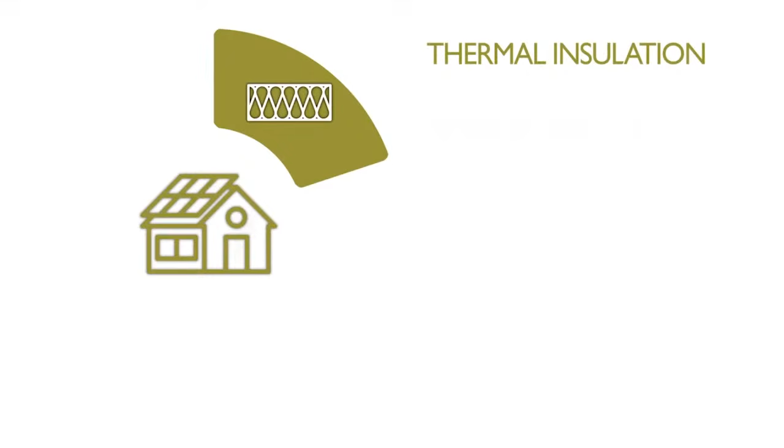There are 5 basic passive principles: thermal insulation, thermal bridge free design, airtightness, ventilation with heat recovery, and passive house windows, or more generically, high-performance glazing.

The purpose of designing according to these principles is to minimise the energy inputs required to maintain a comfortable indoor temperature. Ideally, the space heating and cooling energy requirements can be reduced to the point that passive sources such as solar gain and heat from the building occupants are sufficient for most of the time.

The Passive House Institute provides software, known as the Passive House Planning Package, or PHPP, to calculate these energy loads, and provides prescriptive guidance and details along with product certification.

While this approach certainly simplifies the process and ensures rigorous adherence to good or best practice, it does not always allow designers the necessary flexibility to balance the full range of project requirements.

In such cases, the Passive House guidance and principles can be viewed as best practice recommendations for designing buildings assessed by other means, such as national building regulations.

That said, the verification and certification services provided by the Passive House Institute can serve to greatly simplify planning and approvals for such buildings, and reinforce confidence and trust with subsequent buyers and sellers.

So let's now consider how the 5 basic principles can be applied and what they mean.

Thermal insulation is what limits the loss of heat from the building envelope and is the cornerstone of the fabric-first approach to building design. This approach seeks to maximise the performance of the basic components of the building, rather than relying on mechanical or electrical systems.

The fundamental physical property of insulation material is their thermal conductivity, also known as the K value or lambda value. This property measures how well heat can flow through the material by conduction.

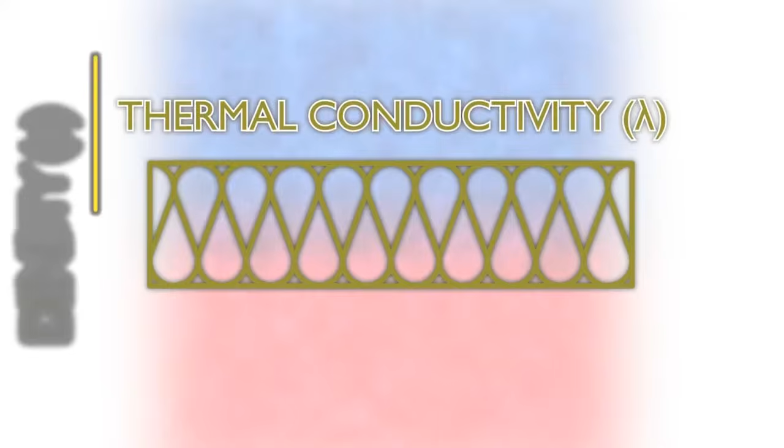In this mode of heat transfer, heat energy is transferred between the individual molecules of a material by direct contact. Because of this reliance on physical contact, there's a correlation between the material's density and its thermal conductivity.

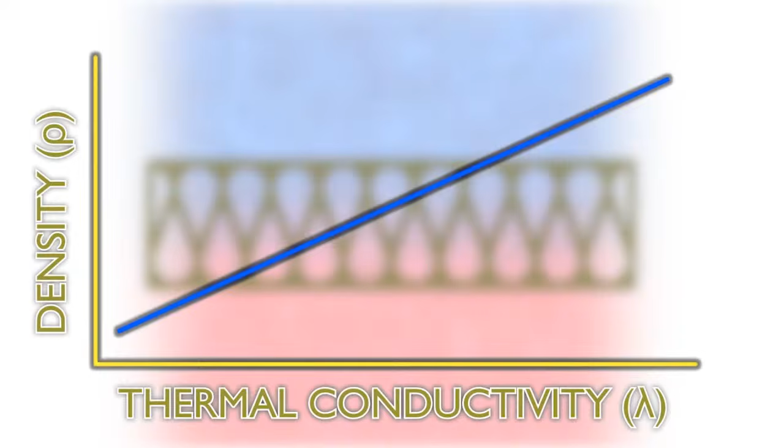So less dense materials such as foams and fleeces are less able to conduct heat than denser materials like bricks or concrete. Bricks, for example, have a thermal conductivity of 0.77 watts per metre Kelvin, while our Spacetherm aerogel insulation is far lower at 0.015 watts per metre Kelvin.

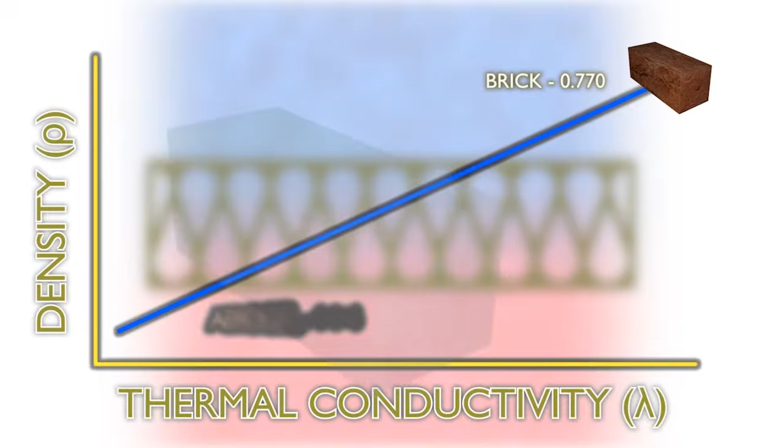Thermal conductivity, however, only looks at the basic material. It doesn't account for the thickness.

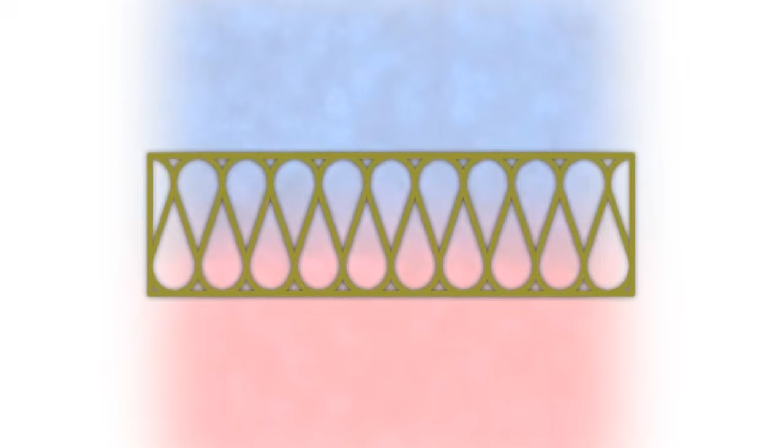To factor in the material thickness, we take thickness in metres and divide it by the thermal conductivity to give us the thermal resistance, or R value, in metres squared Kelvin per watt.

The next step is to convert that into a value for an entire wall, for which we use the thermal transmittance or U value, which is the inverse of the sum of the other R values for the different layers in the construction.

U values are quoted in watts per meter squared Kelvin. Where R values vary proportionally to thickness of materials, U values do not, so as we move to lower U values, we need to add exponentially more insulation to improve them further.

As an example, the limiting fabric parameter, more commonly referred to as the backstop or worst permissible U value for a wall given in approved document L for England and Wales, is 0.3, and the recommended worst case for a passive house is 0.15. The best practice passive house value is considerably lower at 0.06.

In practice, compliance with either standard is more complex than achieving a simple maximum U value, but roughly speaking, the worst case U value for a passive house would be considered pretty good under national building regulations.

The next principle is thermal bridge-free design. A thermal bridge occurs either where a material of higher thermal conductivity intersects a less conductive material, or where building elements join, such as at floor zones or corners.

Thermal bridges have two principal negative effects. Firstly, they increase the overall heat loss by providing an easier pathway for heat to escape, and secondly, they create cold spots internally. Condensation and mould growth can occur in these areas, which has a detrimental effect on the indoor environment.

The first of these, typically where structural elements like studs in a timber frame wall intersect the insulation, is accounted for via an adjustment in the U value calculation. This takes the thermal conductivity and proportional area of the bridges and adjusts the U value accordingly.

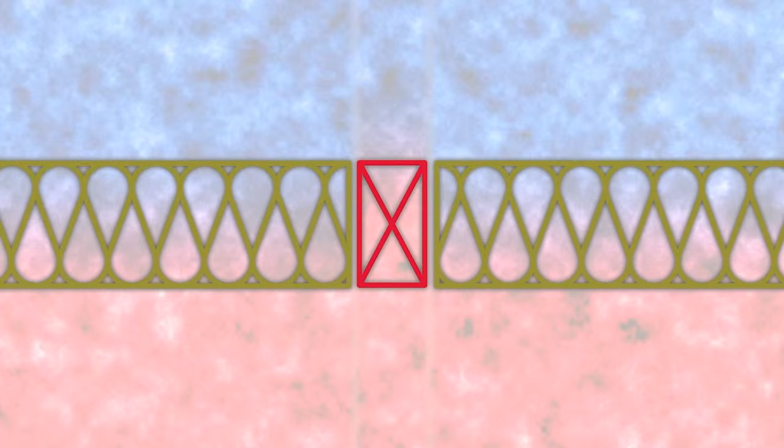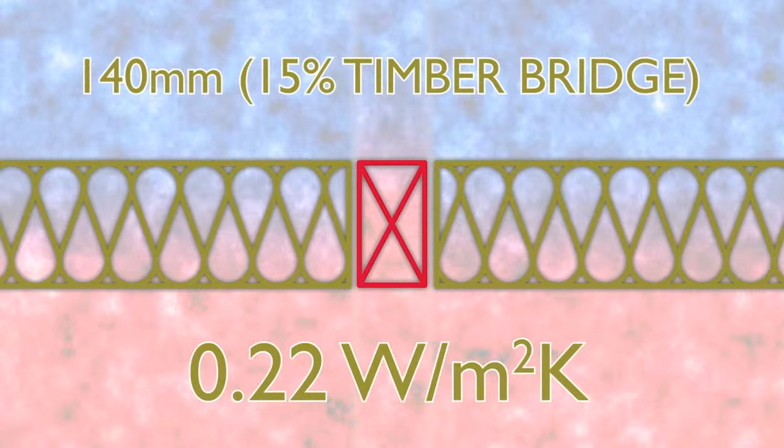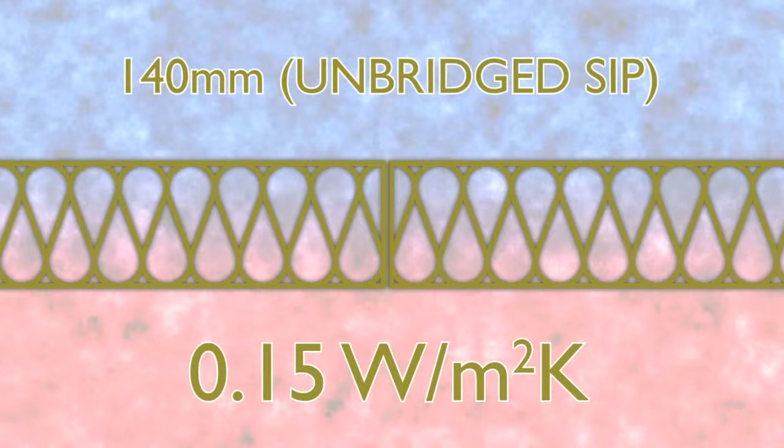If we consider a 140 mm thick panel of rigid foam insulation, if we use this in a typical timber frame wall, the U value then adjusted to account for cold bridging at the timber stud will work out to around 0.22. On the other hand, if we eliminated this cold bridging but used the same thickness of insulation in, for example, a structural insulated panel system, the U value drops to 0.15, purely due to the lack of repeating thermal bridges at the studs.

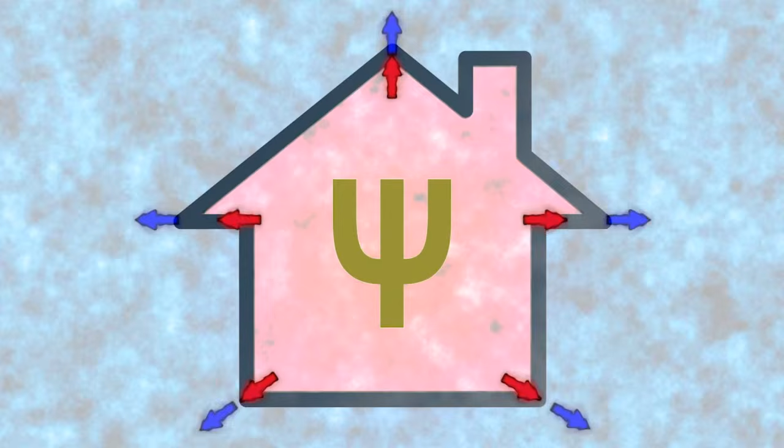Thermal bridging at corners and junctions is accounted for using an additional value for linear thermal bridging, known as a psi value. But in most cases, these are addressed using standardised pre-assessed details to limit heat loss.

The easiest way to visualise the way thermal bridge-free design works in practice is to simply imagine drawing a pencil line around a cross-section of the entire heated envelope of the building. If that can be done without touching anything other than insulation, the design is free from thermal bridges.

Because of the adverse effect that thermal bridging has on both the U value of individual elements and the overall energy performance, whether assessed via PHPP or SAP, reducing cold bridging in low-energy building is a matter not just of principle, but also of practicality.

Getting U values anywhere close to passive houses' best practice performance levels without restricting thermal bridging is virtually impossible. But even in cases where designers are aiming for lower standards, the benefits regarding limiting localised condensation are clear.

Whatever the assessment criteria, high-performance insulation systems like the Spacetherm Aerogel have a very important role to play in minimising thermal bridging by allowing the thermal resistance to be maximised at any given point.

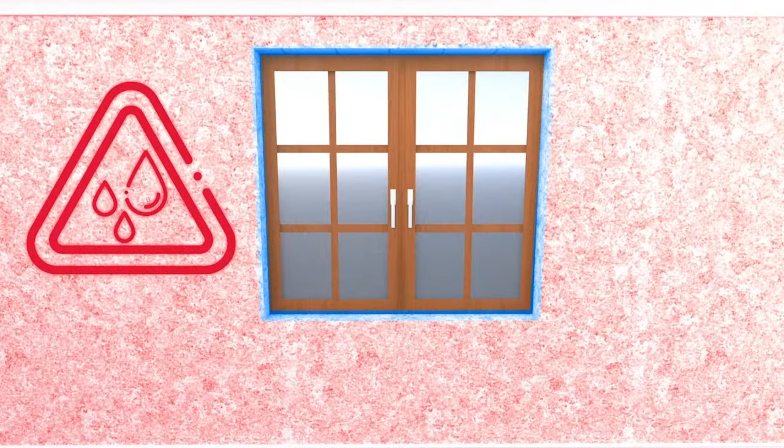In locations such as window reveals and door openings, it can be difficult to maintain a similar level of insulation to that found over the main sections of a wall, leading to these areas being relatively cold. In extreme cases, this can cause the temperature to drop to the point where condensation may occur in these areas.

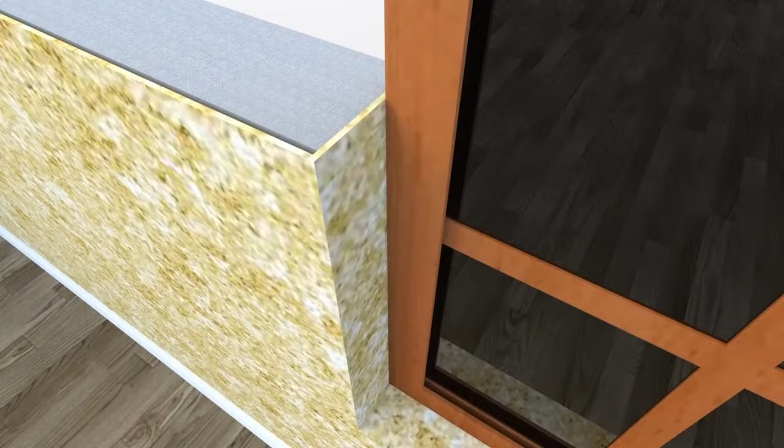As fabric insulation levels increase, so does the importance of continuity and uniformity. Systems such as Spacetherm, which provide high thermal resistances in minimal thickness, allow for a more uniform envelope of thermal insulation performance, with the localised drop in R values around complex features minimised.

The fire-rated Spacetherm Slentex A2 system also allows this continuity to be maintained where reduced combustibility is required, offering significantly higher performance per unit of thickness than conventional fire-rated insulation, such as mineral fibre.

Fibrous insulation quilts typically have a thermal conductivity in the range of 0.035 to 0.044, while the Spacetherm is 0.015 to 0.019, meaning like-for-like performance can be achieved in less than half the thickness.

While big thicknesses of insulation are expected and accounted for in passive and low-energy projects, it's not always possible to maintain such thickness over every part of the structure. Spacetherm can allow this uniformity to be achieved, and being of comparable permeability to fibre quilt, this can be achieved without compromising moisture movement.

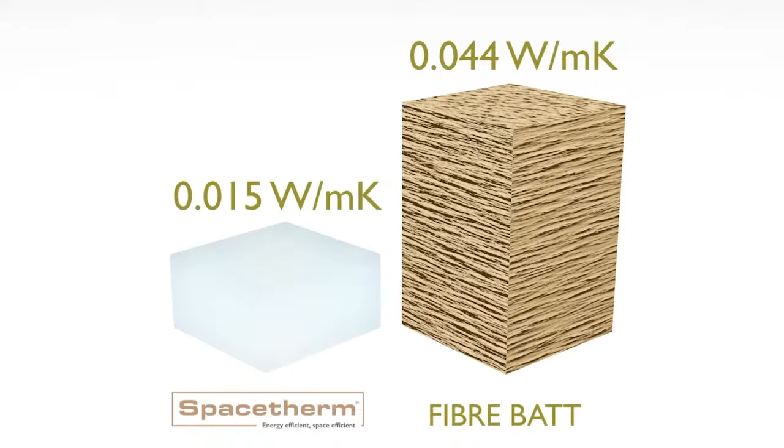Spacetherm can be supplied in a variety of laminated board systems to suit most applications, as well as in self-adhering cold bridge strips for direct bonding to structural elements such as steelwork. This need to create uniformity of insulating value and prevent cold spots is also an important aspect to consider.

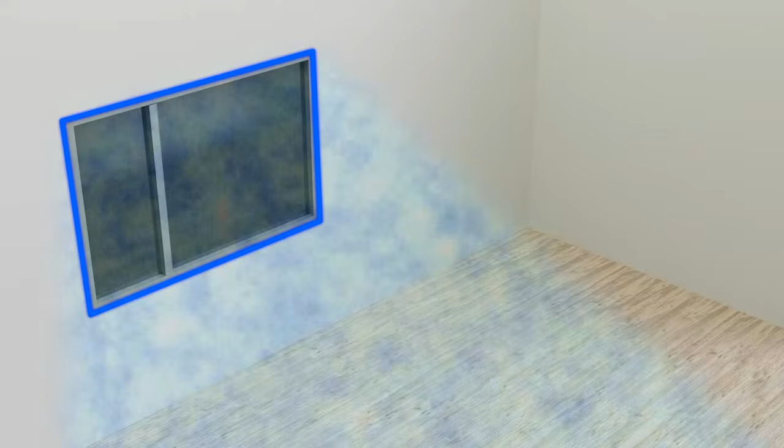When specifying windows in low-energy and passive projects, particular attention must be paid, as poorly insulating windows can not only affect overall heat loss but, as with cold bridges, can also create cold spots and cold radiation. This phenomenon occurs where the influence of a cold surface can be felt nearby, often leading to a perception that a space is colder than it really is.

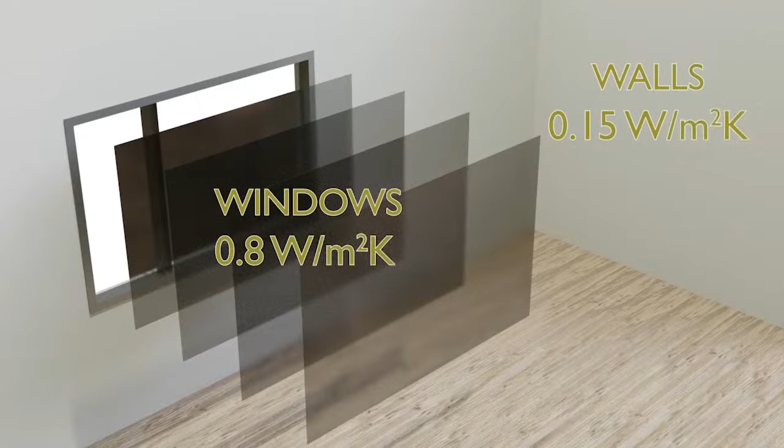Even using multiple layers of glazing, inert gas fills, and thermally reflective coatings, windows still typically fall a long way short of the performance of the rest of the building envelope, with passive house specifications calling for windows with a U value of 0.8 or less, significantly above the opaque elements.

Windows are also important to provide heat into the building via solar gains, and for this reason passive houses in heating climates like the UK tend to position the majority of glazing facing south in order to maximise this effect.

This requirement to maximise collection of solar heat has to be carefully managed though, as highly insulated and airtight homes can be susceptible to overheating if this is not carefully assessed and managed.

It's a common misconception that passive houses do not have opening windows, but in fact the specifications call for at least one opening window per room in the living spaces. Opening windows is among the most cost-effective and simple means of counteracting overheating, and is useful to prevent poor indoor air quality in exceptional circumstances such as large gatherings.

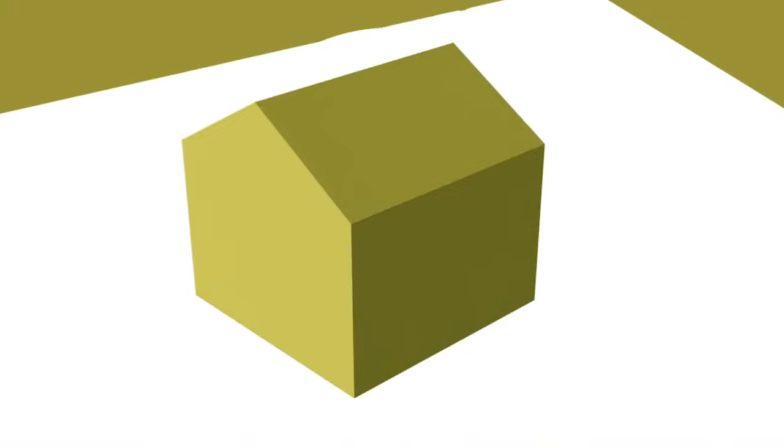That leads on to the next concept we need to consider, the airtightness of the structure. It's often said that airtight buildings can be like living in a plastic bag. However, this is a fundamental misunderstanding of what we mean by airtight buildings.

Reducing air leakage simply means eliminating sources of air infiltration and exfiltration over which we have no control - drafts, in other words. A good supply of fresh air is a critical component of healthy indoor living environments, and the passive house specification is designed to ensure this is facilitated by controlled and carefully managed ventilation systems, with considered impacts on energy performance. Uncontrolled air movement, on the other hand, should be reduced as much as possible.

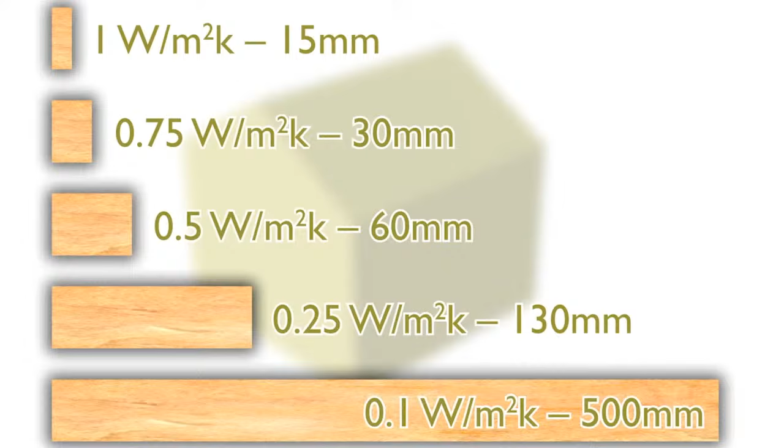As we've covered already, the thickness of insulation layers increases exponentially with reductions in U value, and after a certain point this becomes both uneconomical and impractical, even in explicitly low-energy buildings. It's therefore very important that every other factor affecting energy performance is controlled and limited to minimise energy usage.

In dwellings, there are two main drivers of air leakage: the internal stack pressure caused by the relative buoyancy of warm air and resultant convection, and external forces from the wind. Because warm air is less dense, it will rise upwards in a building and can leak out of any air pathways found at higher levels.

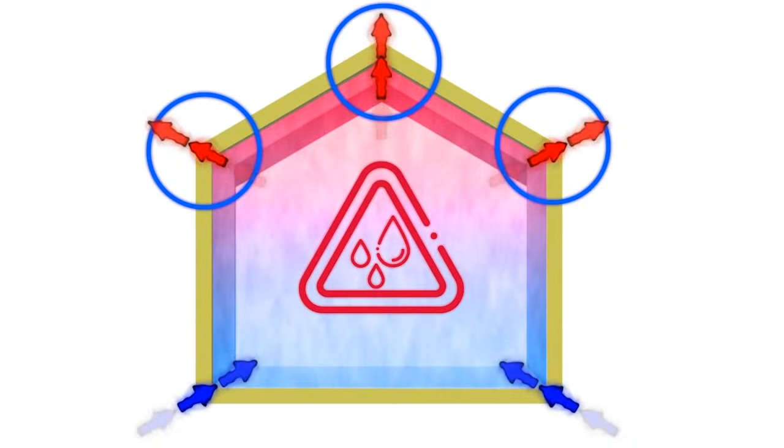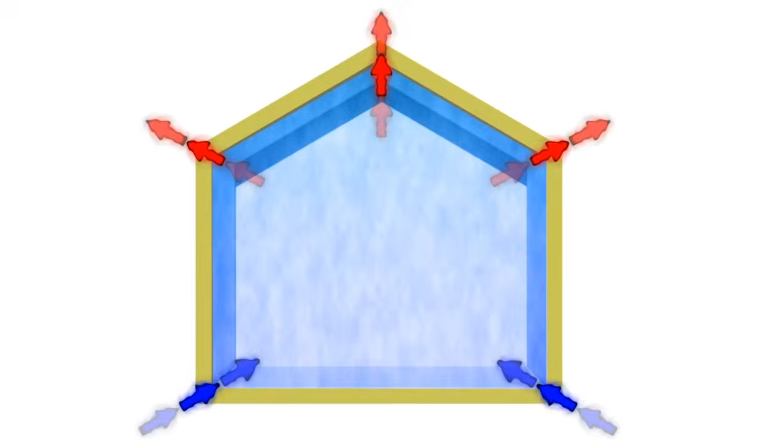Correspondingly, as this air rises, colder air must be drawn into the building lower down. As the warmer air will contain significantly more moisture, this outward air leakage can lead to condensation issues as the leaking air cools and deposits liquid water. The cooler air entering the structure lower down will lower the internal temperature in the building, necessitating energy input to maintain the temperature of the habitable space.

Externally, the wind forces acting on the building will have similar effects, but instead of the pressure gradient working from bottom to top, it will be aligned to the wind direction. Cold air will be pushed in on the windward side where there is a positive pressure, and warm, moist air sucked out on the leeward side where the pressure is negative.

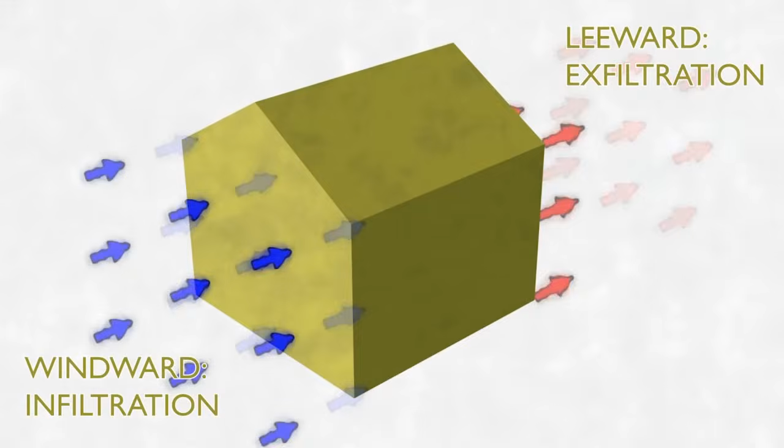Limiting this air movement is a critical part of low-energy design, as even a highly insulated building will have poor energy performance if the movement of air is not controlled.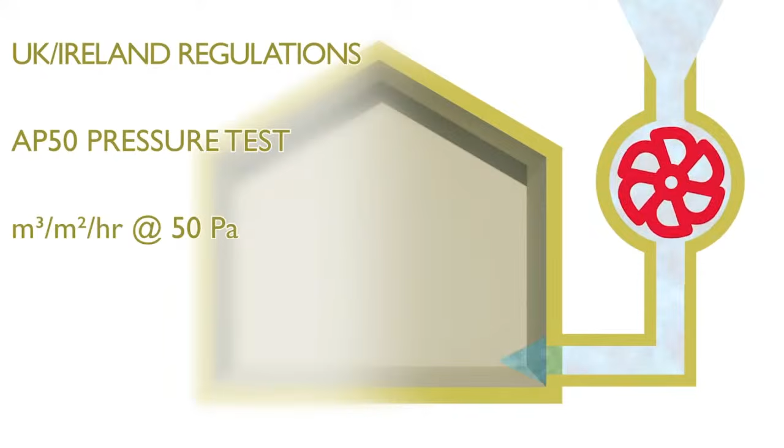Both the building regulations and passive house standards therefore include pressure testing and minimum performance levels, but there are some important differences. The UK building regulations use a pressure test known as AP50, which is the volume of air in cubic metres that flows through the building fabric area in square metres in one hour when a reference pressure of 50 pascals is applied. This pressure can be applied in either direction, by pressurising or depressurising the building.

The backstop value for this is 10 metres cubed per metre squared per hour in England, Wales and Northern Ireland. In Scotland and the Republic of Ireland, the preferred or reasonable limit is set at 7, and while it's theoretically possible to comply with a higher value, the necessary trade-offs will generally be unacceptable.

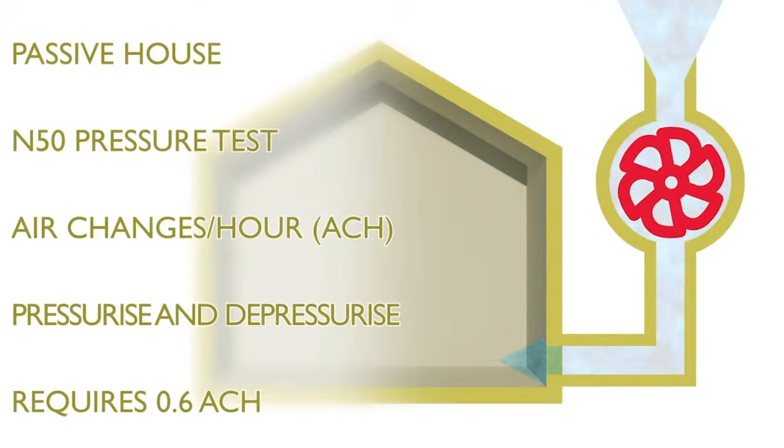Passive House expresses air leakage differently, using a standard called N50, which is the air changes per hour through the building's internal heated volume, ACH, at the same 50 Pascal reference pressure. In the Passive House test, pressure must be applied in both directions, pressurising and depressurising the building, and the two results averaged. The test equipment and procedure is largely the same for both AP50 and N50 tests, so it's possible to run both simultaneously, but the way results are calculated is different enough that conversion between the two values isn't possible without the source data.

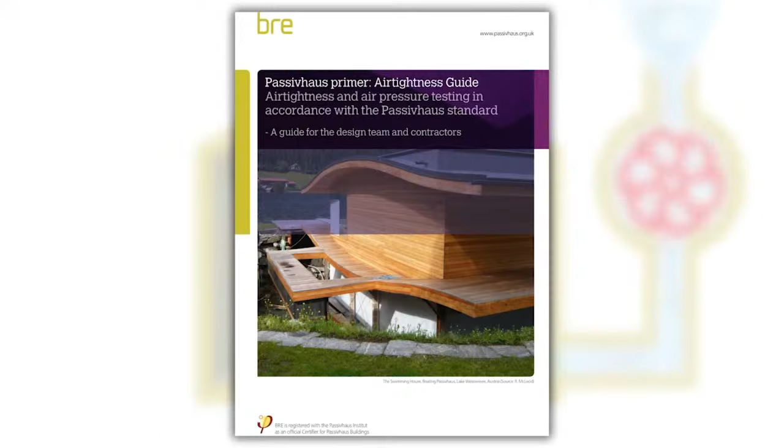There are numerous ways of making buildings airtight, and finding the most appropriate method for a given project is usually a matter of balancing competing requirements. Some strategies are easier than others, however.

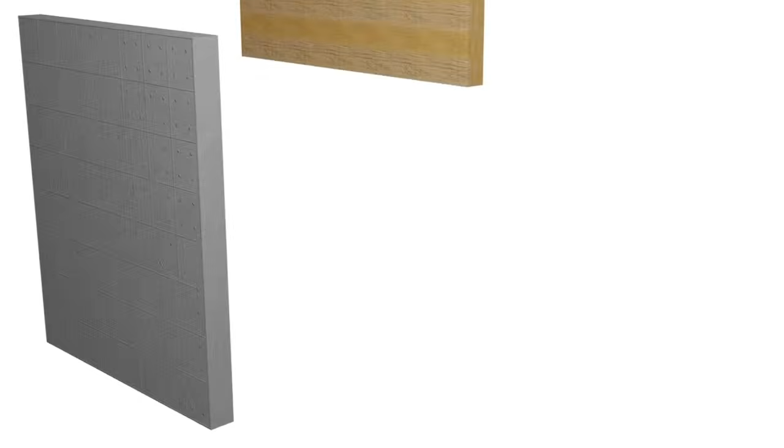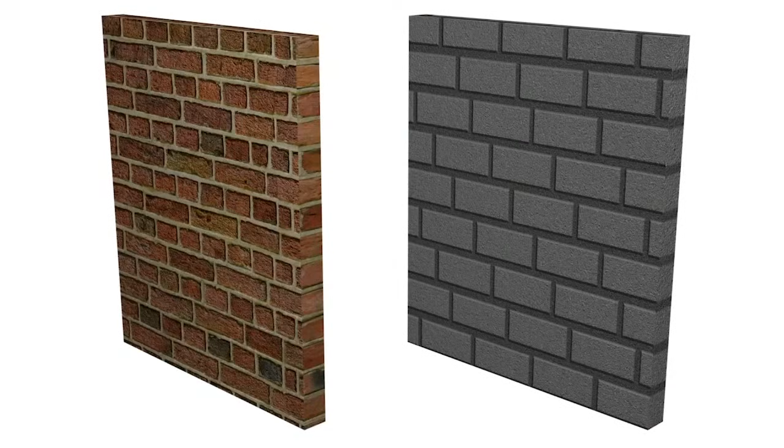Some building materials, such as cast concrete, cross-laminated timber and structural insulated panels, have an inherent advantage when it comes to air leakage, as the basic materials involved have low air permeability. Others, like blockwork, are more permeable, so require additional measures to control air leakage. In all cases though, junctions, services and the nature of the on-site assembly process still pose challenges to achieving a low air leakage rate, even when using the most impermeable base materials.

The conventional solution to this is to seal the inside of the building using a vapour and air barrier membrane. The advantage of this approach is that the membrane fulfills a dual purpose, limiting both air leakage and vapour ingress into the structure. It's also something most contractors are familiar with.

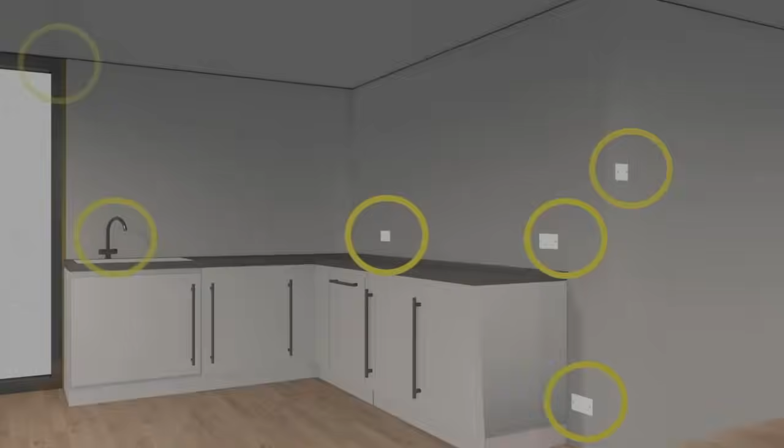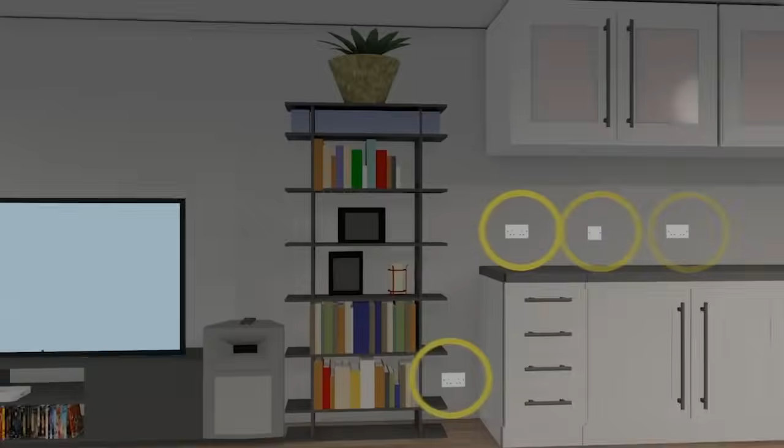The downside to this approach is that membrane integrity can be compromised by a variety of components and processes. Being internal, building services such as power, plumbing and network cabling must run through an internal air and vapour control layer. While this need not necessarily pose a problem, the nature of sites and trades, particularly in the UK, is such that VCL integrity cannot necessarily be depended on.

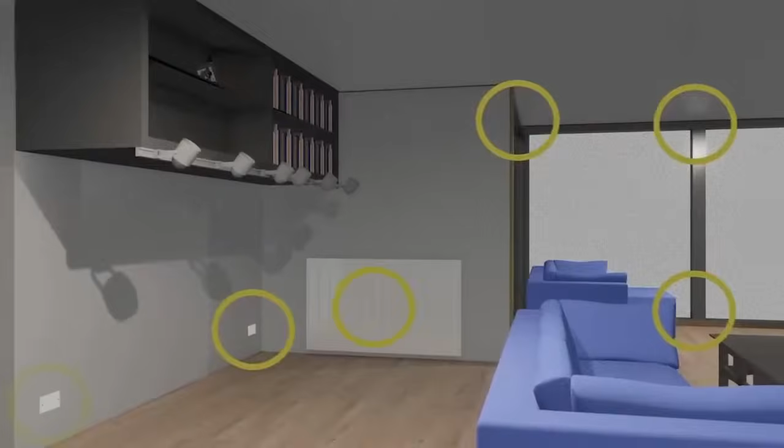Unless contractors of all disciplines are aware of the importance of this layer, suitably trained and equipped to avoid damaging it, and afforded sufficient time and space to undertake works in a manner that avoids puncturing this membrane, the scope for problems is limitless. Features like service voids, flexible pipe and cable gaskets, and sealed light fittings can all go some way to mitigating these risks, but these all increase costs and time demands, and aren't necessarily familiar to all contractors.

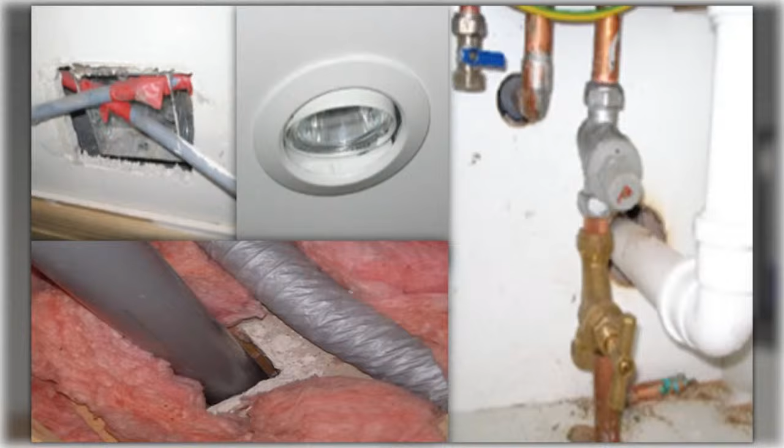For example, in Scandinavian countries, where low air leakage rates have long been standard practice, every plumber and electrician will be used to working carefully around air barriers. However, in the UK it's not uncommon for holes to be cut and drilled and work undertaken with no thought given to any knock-on effect on air movement.

It can also take far longer on site to ensure every joint and penetration is adequately taped and sealed, often requiring different types of tapes for different circumstances. Acquiring all these tapes and sealants can also pose challenges if needed at short notice. Although this is changing gradually, with more contractors gaining Passive House certification, it's perhaps prudent for specifiers of low-energy buildings in the UK to look at alternative methods to mitigate these risks at the design stage.

Moving the air barrier layer to the outside of the building, well away from any services and following trades, allows this to happen. Our Wraptite product is a self-adhered, vapour-permeable but airtight membrane suitable for use in both wall and roof applications. It's also certified by both the Passive House Institute and the BBA, so can be specified with confidence as an effective air barrier layer.

On the outside of a building there are far fewer penetrations to seal, and those that are present tend to be larger and simpler to seal. Because the membrane is adhered fully to the substrate, it's also better able to resist damage. The self-adhesive backing also makes sealing laps and joints simple and fast, and the membrane itself can be fitted off-site, allowing it to provide protection during transportation as well as being used in the construction.

In an off-site installation, the joints between adjacent panels or modules can be simply jointed on site using our split liner tape, which ensures fast and effective seals can be made in the air barrier.

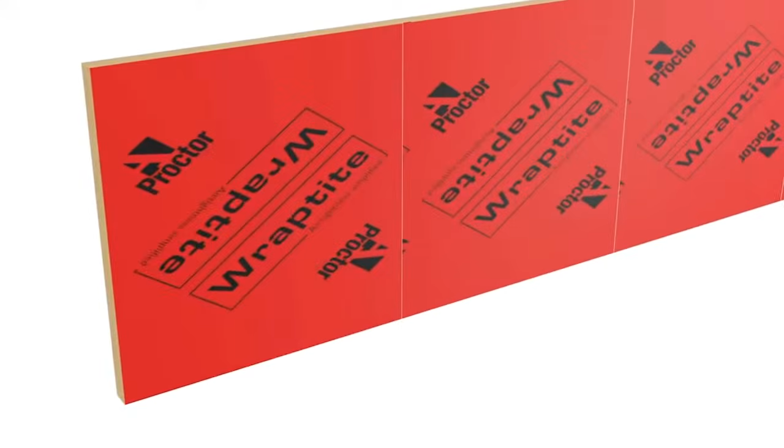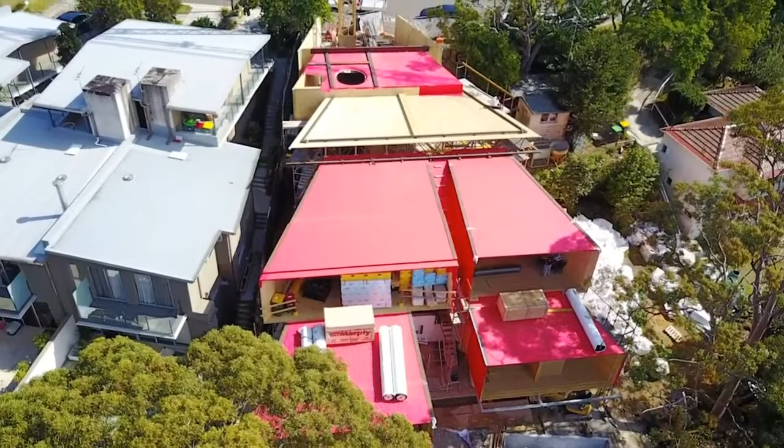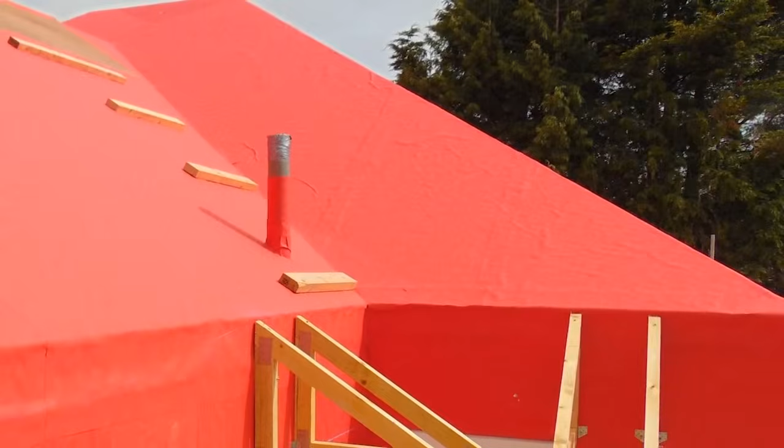This also facilitates straightforward sealing of complex curves and forms, and means features such as floor zones and roof and wall junctions can be easily dealt with by simply wrapping the whole building in a single product. Once fitted, the building shell is then wind and watertight, so progress can be made on fitting out, and air pressure testing can be undertaken earlier in the build scheme, giving more flexibility on timings and potentially easier fixes to any problems that do arise.

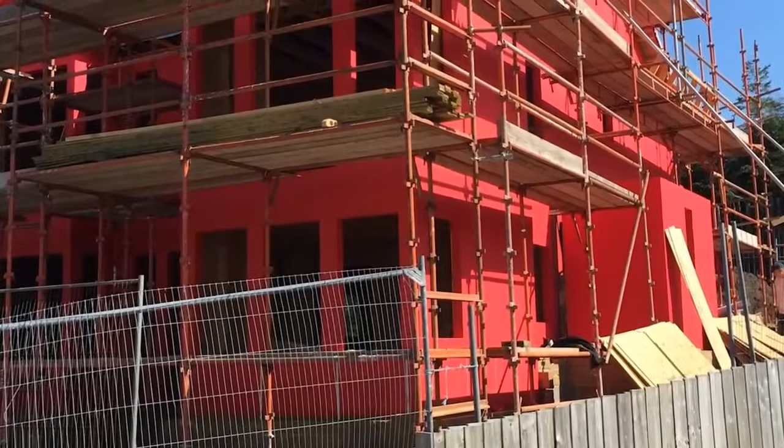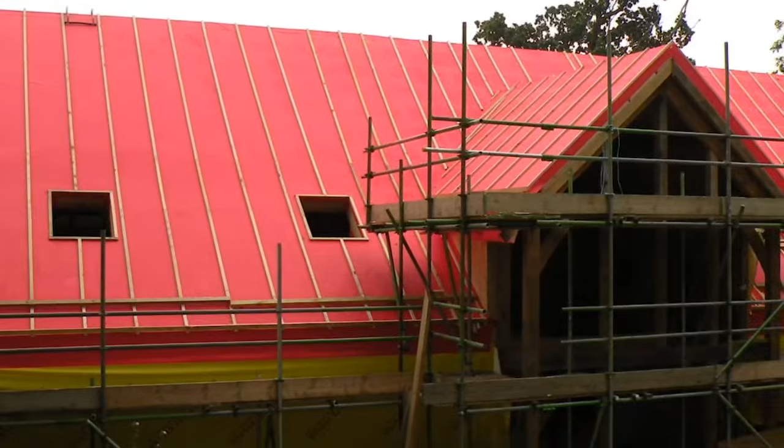The primary benefit of the wrap-tight system is not so much that it reduces the overall air leakage rate, more that it makes achieving design air leakage rates far easier and more reliable. This in turn allows the benefits of airtight construction to be fully accounted for and integrated into holistic design, without fear of expensive and awkward remediations if targets are not met.

The vapour permeability of wrap-tight also allows flexibility in insulation placement. It's perfectly possible, for example, to wrap a building with insulation between stud-work and wrap-tight, then fit additional external insulation layers to limit cold bridging without causing any moisture problems.

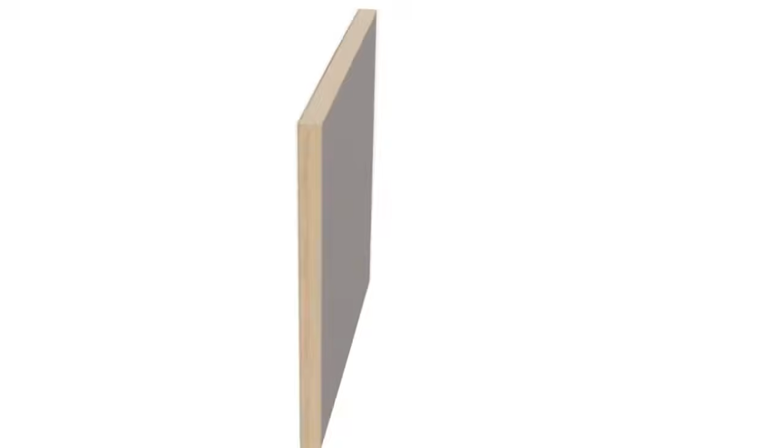That's not to say that we do not need to consider moisture control in this type of construction. An internal vapour and air barrier will also serve to limit the ingress of moisture vapour into the construction. So if we move the air barrier externally, we need to ensure that moisture is adequately controlled to prevent any condensation problems from arising. This can be achieved by either using insulation with a lower permeability to moisture vapour, such as most types of rigid foams, or by using a warm frame construction with insulation placed externally to limit temperature drops and ensure the dew point does not occur internally.

Another option is to use a variable resistance membrane, such as our Procheck Adapt. This type of specialist membrane has been used in passive house constructions across Europe for many years, and when combined with an external air barrier membrane provides a comprehensive moisture and air movement control solution.

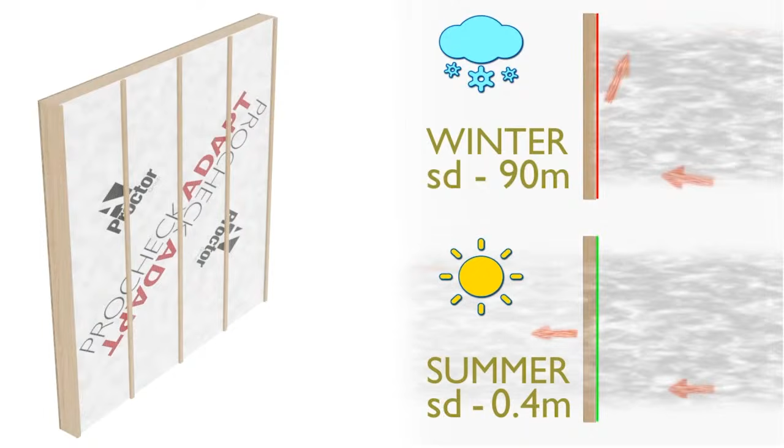The Procheck Adapt varies its resistance to moisture vapour according to the environmental conditions, becoming more resistant to vapour ingress in winter when condensation risks are highest, and then more permeable over the summer to facilitate drying out and allowing a more breathable construction. Used alongside wrap-tight, Procheck Adapt provides an additional level of protection against both air leakage and moisture issues. Any moisture that does make it into the construction as a result of damage during installation can easily dry out in either direction, while the movement of air is reliably restricted by the external air barrier.

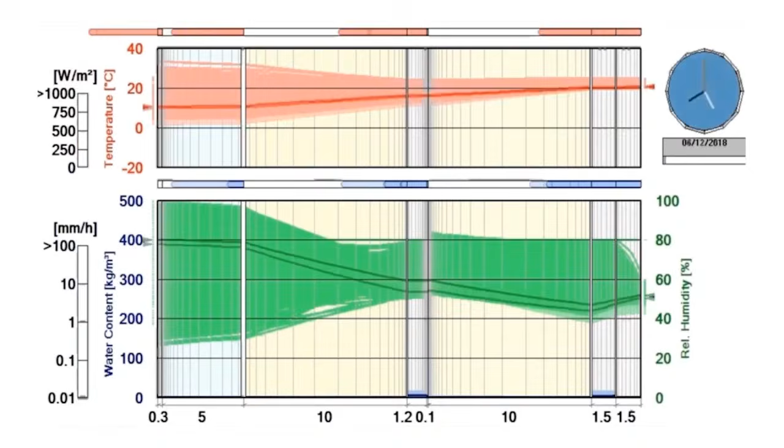We also have the capability to run WUFI-based condensation risk calculations. This covers a wide range of factors to ensure buildings are able to manage the interactions between heat, air and moisture movement. We've covered this in more detail already in our Membranes Explained, and an Introduction to Building Physics webinars, and you can go back and review those on our website or YouTube channel if you'd like a bit more detail on that, or you can book a virtual meeting with one of our team if you'd prefer.

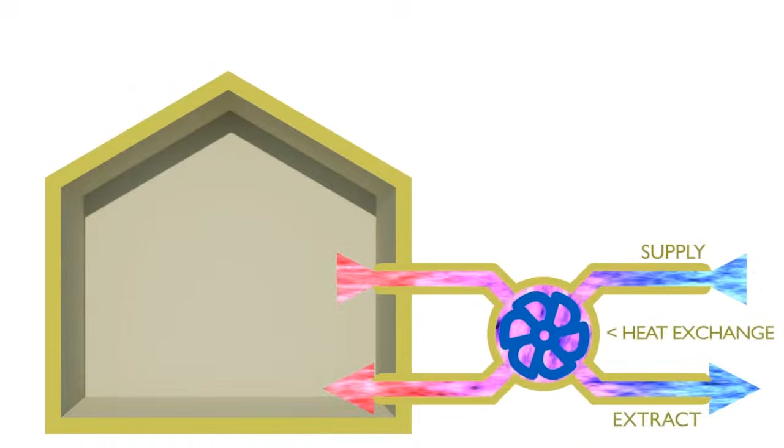The last of the passive principles is the use of ventilation with heat recovery, in which heat from the extracted airflow is recovered through a heat exchanger and fed back into the building via the incoming supply air. This improves the efficiency of the building by reducing heat wasted by the extract airflow, and such systems are generally required as part of the Passive House certification.

Without heat recovery ventilation systems, it can be difficult to meet the space heating energy requirements. This requirement in the Passive House specification often leads to an incorrect assumption that all airtight buildings require mechanical ventilation. If designers are not working to the Passive House certification specification, then various other options for both ventilation and heat recovery are available. In fact, it's perfectly possible to have good indoor air quality at low air leakage levels with a fully passive ventilation system, provided this is designed into the building early enough.

What's important here is ensuring the building as built meets what is specified, and here's where systems like wrap-tight are particularly useful. If you design the building heating and ventilation systems to operate with an air leakage rate of 3 meters cubed per square meter per hour, but when tested the building only achieves 7, then problems can arise as highly optimized heating systems may not be able to compensate for this shortfall.

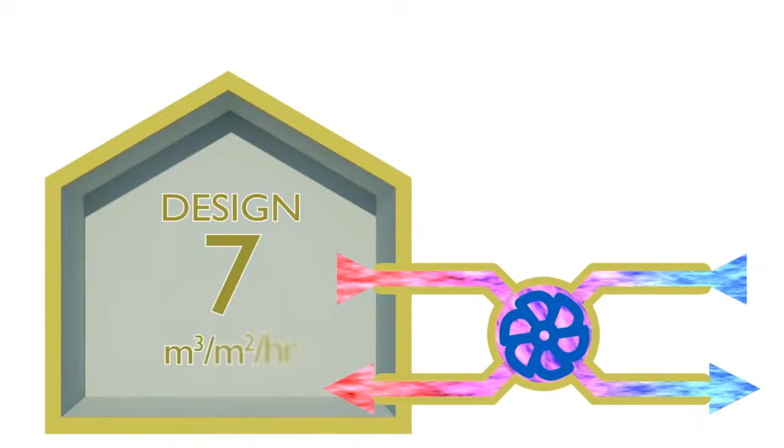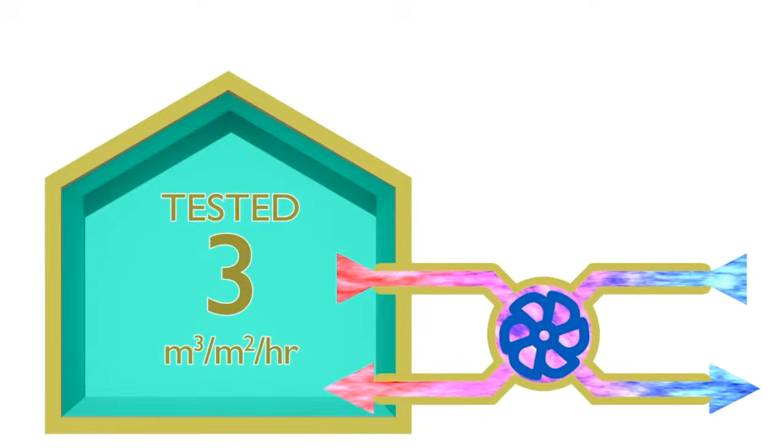Conversely, if you design to 7 meters cubed per square meter per hour and actually achieve 3, then ventilation may not be able to supply sufficient fresh air to provide acceptable air quality. What's important is ensuring the building is constructed within its design specification, thus allowing all the building systems, active or passive, to perform as intended.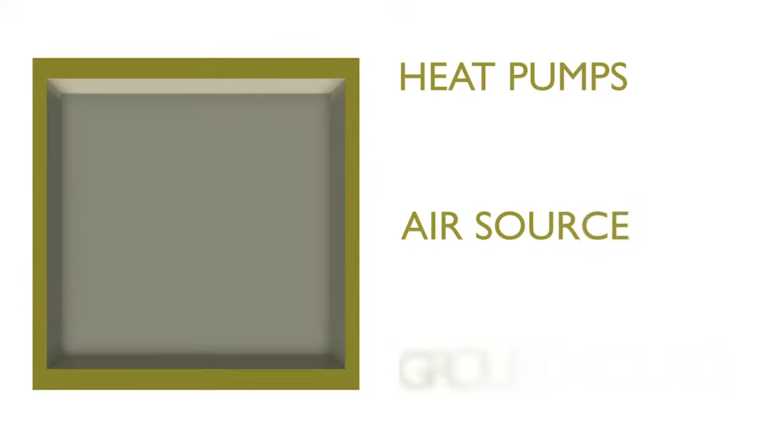A further possibility for the recovery of heat to lower the energy use in a home is to use heat pumps in the heating system. There are two primary types of heat pump: air source and ground source. Air-sourced heat pumps, or ASHPs, use heat-exchanging fluids and compressors to extract heat from the ambient external air supply.

Ground-source heat pumps recover heat from collector loops buried underground. Fluid is circulated through these loops and picks up heat from the ground, which is then fed through a compressor and heat exchanger used to heat the home.

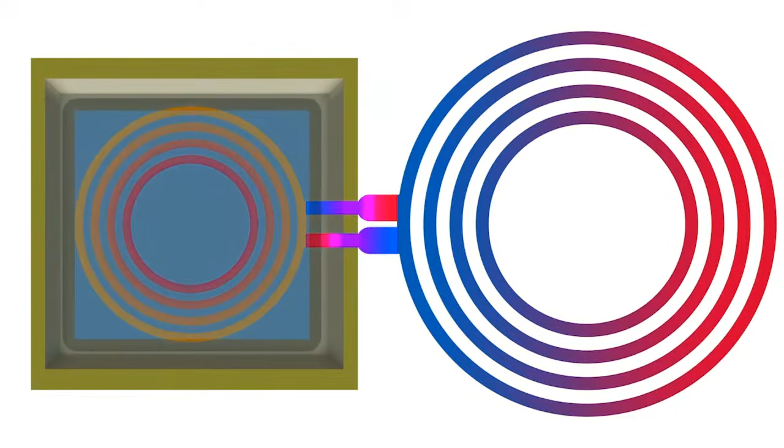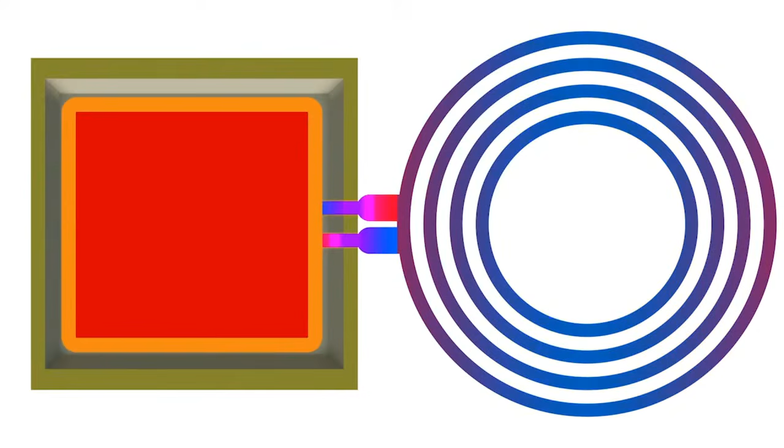Both of these systems commonly use a large water tank to act as a heat store, using the thermal mass of the water to retain heat energy until required by the heating and hot water systems in the house. Ensuring this heat store is well insulated is critical to efficient operation, and we have supplied Spacetherm insulation in blanket form for use in insulating a huge variety of tanks and vessels.

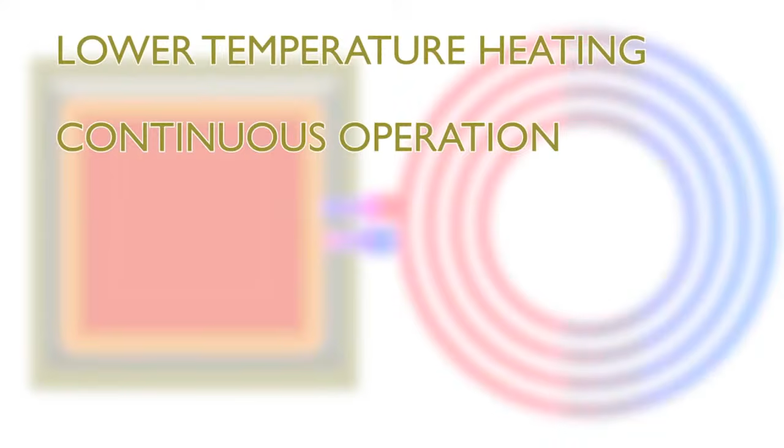Both ground and air-sourced heat pumps are designed to operate at lower temperatures than fossil fuel or electric heating systems, and this works particularly well with underfloor heating. These lower temperatures, as well as lower running costs, mean these systems are typically designed to run continuously or almost continuously, with less scope than traditional systems to boost output for additional demand. The better the energy performance of the dwelling, the more effective they will be, making these systems a good fit for low-energy homes.

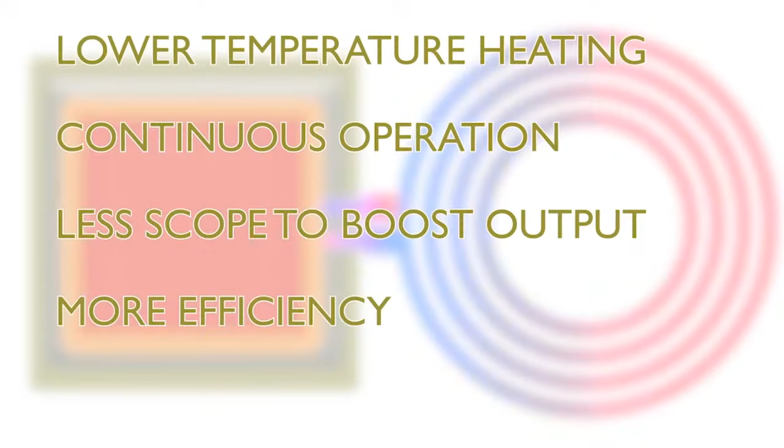The relative lack of spare heating output also reinforces the importance of predictable and reliable energy performance at the specification stage, as the only practical solution to an under-specified underfloor heating system is often auxiliary electrical or solid fuel heating, which may not be a good fit with an energy-focused project.

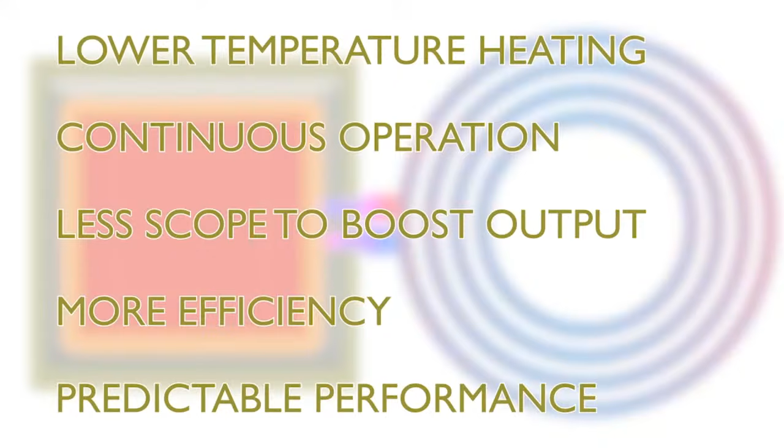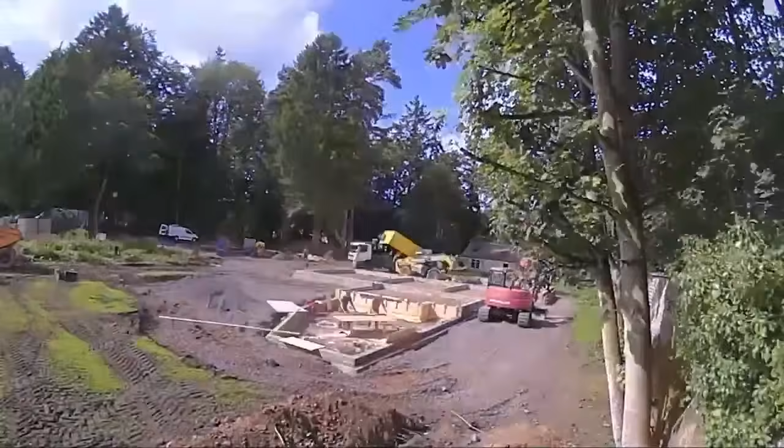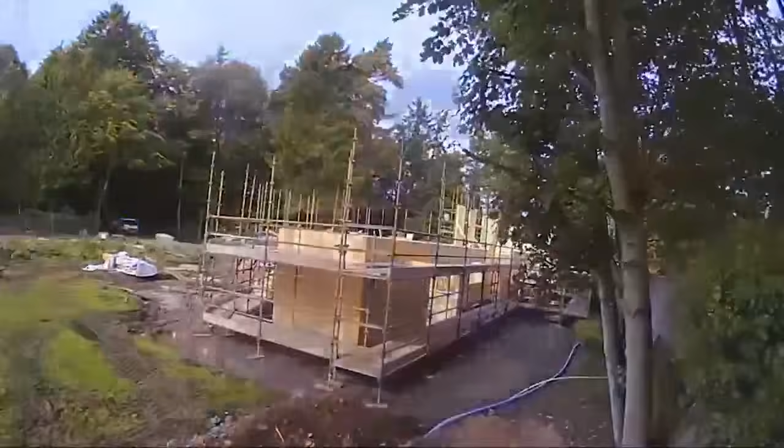Although it's not Passive House certified, my own house used many of these principles to deliver an award-winning low-energy design by Scottish practice Alan Corfield Architects. Completed two years ago, it's a structural insulated panel home adopting the passive principles of thermal bridge-free design and highly airtight construction, and also used mechanical ventilation with heat recovery to minimise energy requirements.

If you've been following our webinar series, we discussed structural insulated panels last time, and this particular system is the Kingspan Tek panel system, supplied and erected by SIPS Scotland. These panels use a rigid urethane core with OSB facings, which limits cold bridging by having no structural penetrations through the insulation layers.

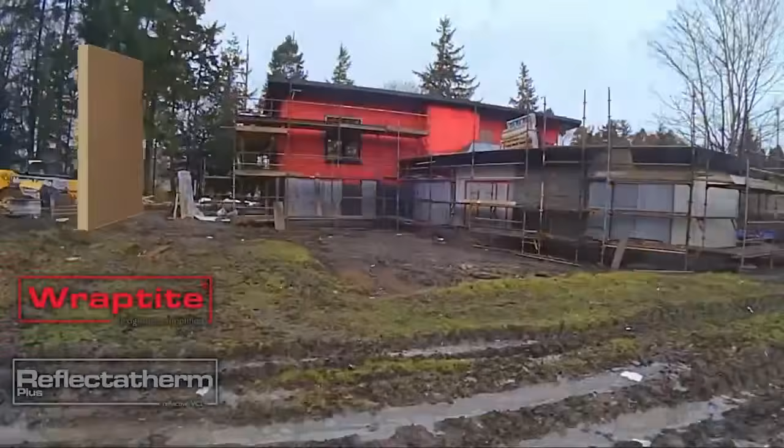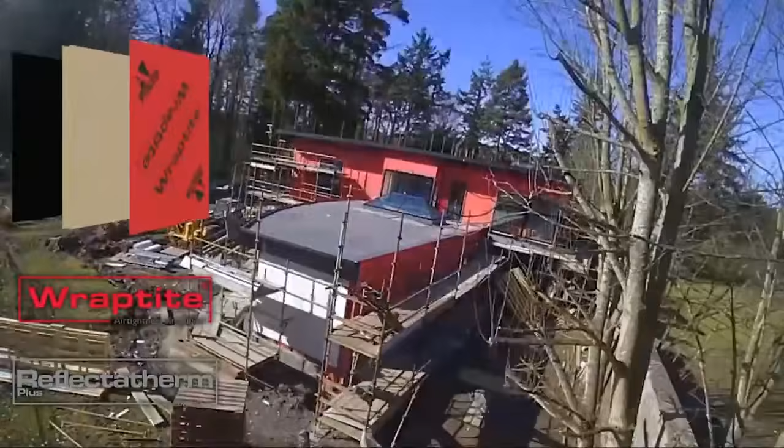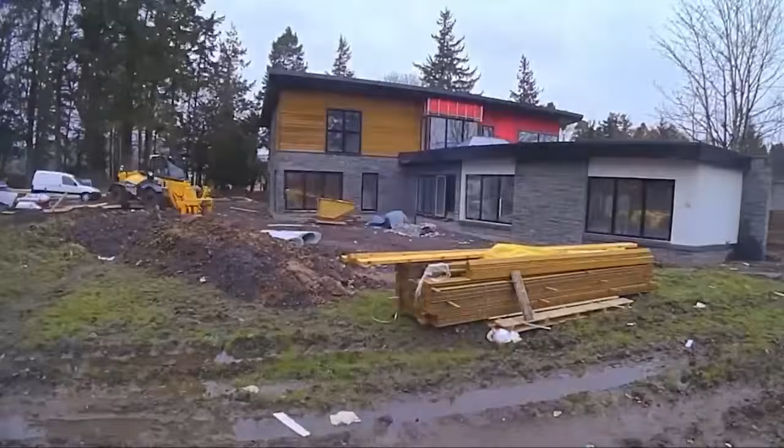OSB also delivers good air leakage performance, boosted here by using both Wraptite externally and our Reflectatherm Plus reflective vapour control layer on the inside. This reflective system not only lowers the U-value of the wall with its 0.78 thermal resistance, but the adjacent service void helps minimise penetration through the VCL, reducing potential for moisture vapour ingress and further limiting air movement. The Reflectatherm Plus, like the Procheck Adapt, features an integrated lap joint tape, helping facilitate a good quality installation.

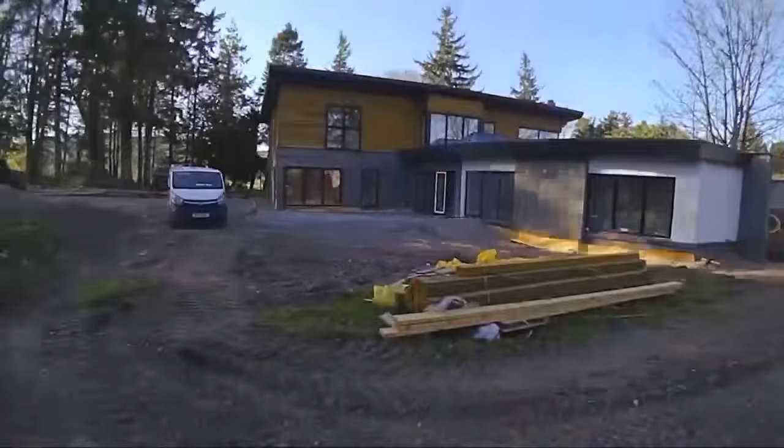The use of systems and materials which simplify installation, along with the experience and expertise of specialist contractors familiar with SIP systems and delivery of low-energy focused projects, was key to delivering good results.

Hopefully we've covered a lot of the basics today and given you a good overview of where to start with passive and low-energy designs. There really is a wealth of amazing resources out there, from BRE documentation to the Passive House Institute guidance, and we've barely scratched the surface of the factors involved in creating and delivering a successful low-energy home. We do have a team of technical experts across the country, so anyone involved in these kinds of projects, simply get in touch and we can assist throughout the process.

So we'll now move on to the Q&A session.

Good morning everyone, thank you very much for joining what is now our 10th webinar in this series we've been doing since the start of lockdown. I'm not sure if I can still refer to them as lockdown webinars - I know in Scotland I can, we can't go anywhere still. So anyone lucky enough to be watching where lockdown is lifting slightly, we're not there yet, but hopefully we will catch up with you soon.